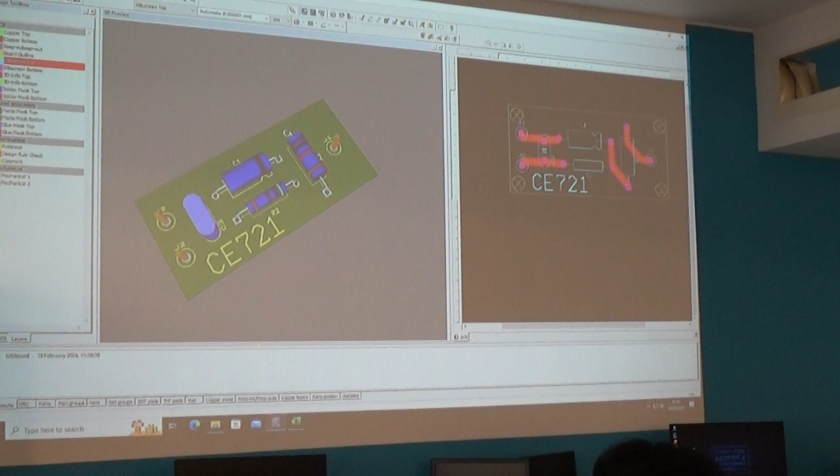Okay, so we've routed our PCB, everything's looking good. We now need to convert that PCB into a standard set of files that can be recognised by all the different PCB manufacturers that are out there. Every single PCB design software comes with the ability to export as Gerber files, however you want to say it. Gerber. I like Gerber. Some people like to say Gerber. And it's a set of standard files that enable their CNC machines and everything to match up their production processes with what your PCB requires.

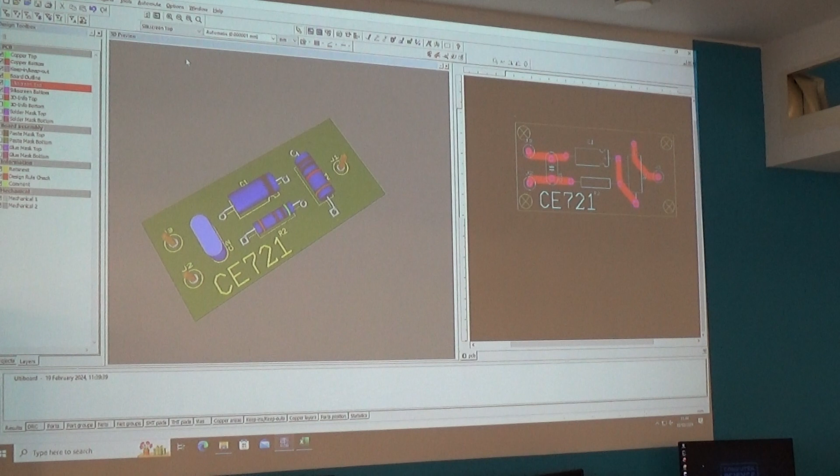So the first thing we need to do is make sure that everything's there and ready to go for our PCB. So final check, because when you send your PCB to the company, they have got no idea what you built and they're not interested. All they need to know is can they manufacture that PCB, so they're not going to check your file. Yeah? If they come back to you and say there's been a few exceptions to your PCB, we found a few short circuits, you're very lucky, because they don't have to. You might have your text mirrored the wrong way, or you might have the top and the bottom layers around. They will manufacture it, take your money, deliver you a PCB that will never work. So you've got to make sure that you do those sanity checks.

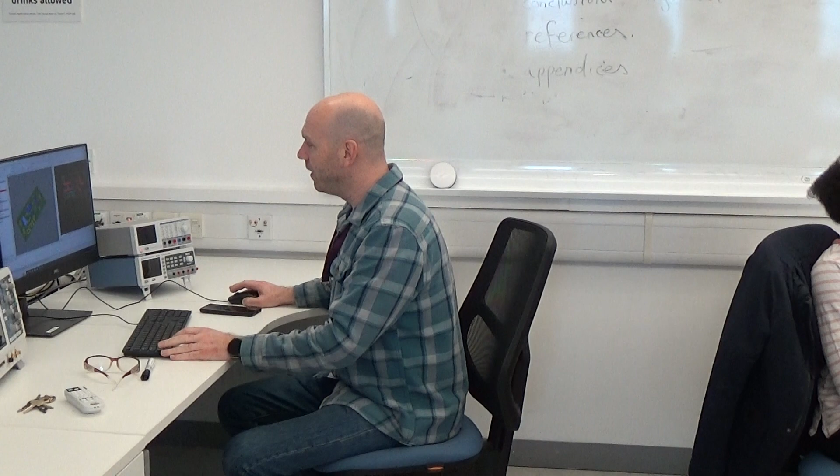So what I've got here is a very simple PCB. It's got 4 or 5 components on, some little pins. Now this is just the PCB part, not the actual building of the board. Once you've designed the PCB and they've manufactured the PCB, it's just a bare board like you've got in your kit. So then you need to go through the manufacture process and then a placement process. We'll cover the placement process a little bit later. Right now we're just going to concentrate on manufacturing this PCB.

So what we're going to do is export this. To do that, we can come along to the export option in Ultiboard. Here we press export, and as you can see, we have some schemes that will allow us to quickly select some defaults for our export parameters. In this case, we don't need to mess with anything really, and from previous experience, it's best that you don't mess with anything, okay? Because you don't have enough time to repeat the process if you need to make a correction. So what this is basically asking me is what layers, you remember the layers and how to create the PCBs, we want to export and send to the PCB manufacturer.

Now nowadays, a fab house will just do everything for you. Before, you would have a certain place that would do the etching, somebody else would do printing, or somebody else might do the drilling. But now normally one place would do a one-stop solution for your entire PCB needs. So we've got to make sure that we have included our copper layers. We've included the board outline. That's very important. Remember when I said that it must be a complete outline, because that is what the fabrication company will price your board against, because that's its physical shape and size, and that ultimately is what their costs are. Yeah? So we make sure the board outline is on there.

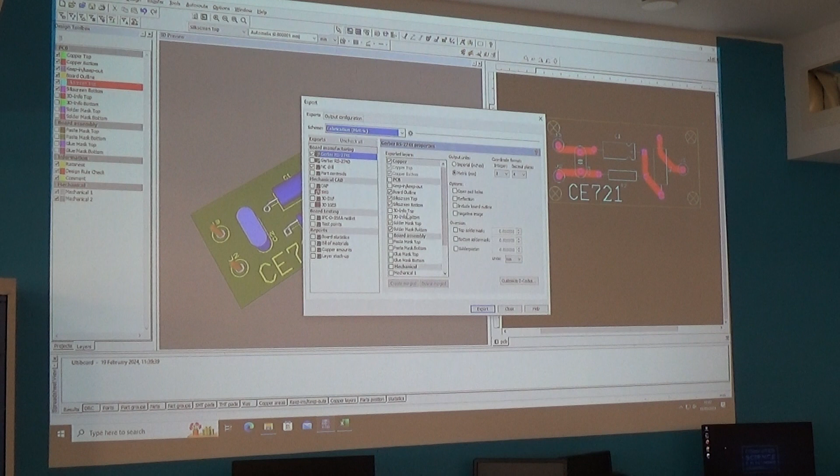We've got our silk screen top and bottom because we want them to print those texts on there. And we've got our solder mask because we want that green chemical coating on top of the PCB to stop the solder giving short circuits. So everything looks very nice there. Don't need to mess about with anything. Just check it out, make sure that these important layers are there. We hit export. Away she goes. Now down here you will see it's completed and it's also done your drill files. Again, I'll explain that quickly.

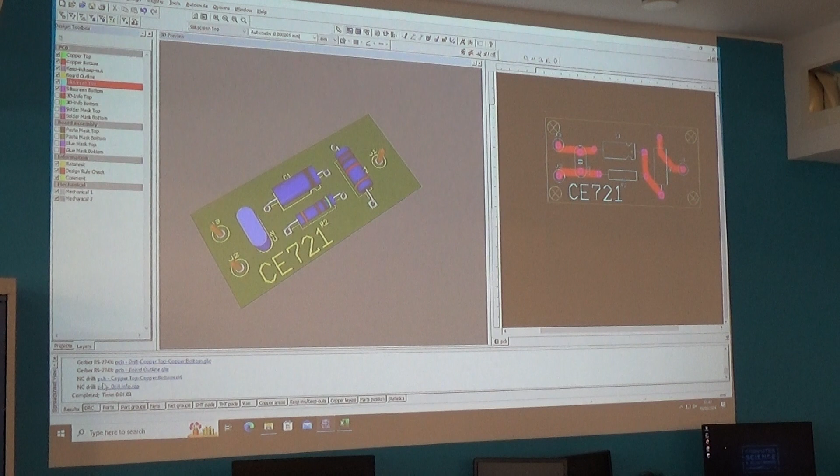When your board goes through the manufacturing process, it will go through various stages. Typically there's some kind of ultraviolet light or printing on the board that marks where all the tracks are. Then it will go to some etching process where the copper will be dissolved away from areas that aren't a track. And then it will be coated with a solder mask. And then somebody will put it in a CNC drilling machine and all the little holes will be drilled for you. So there are separate processes and each one has got one of these separate files.

Now, if we click on one of these files, we'll open, this is where it's exported all my files. So each one of these is a layer. Now, I need to send them all, so what I do is I'll select them all, right, and I'll just send them to a compressed folder, yeah, and I'll call this compressed folder PCBWay, just for my own sanity, yeah.

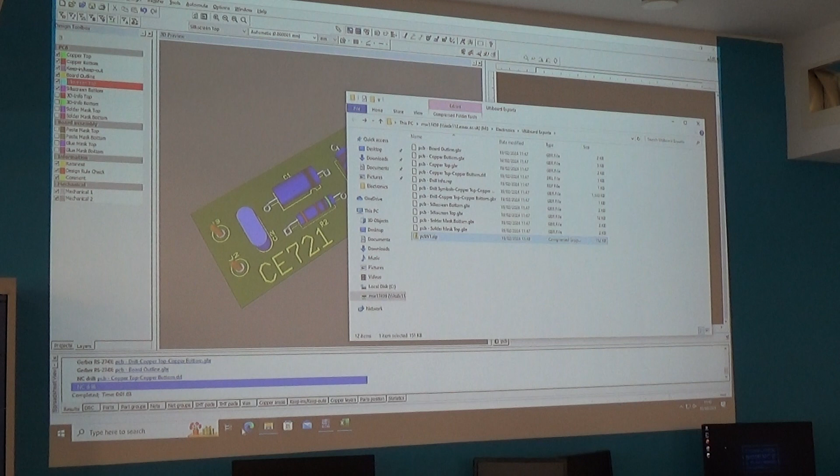So all of these files now, and it's very important they're all there, because if you missed off some important process and you've told the fab plant that you're going to do this, this and this, they're going to send you an exception report back saying you haven't delivered the right files, we can't process it. Yeah? So we've got all of our layers in this zip file. We're now going to go to a fab plant choosing